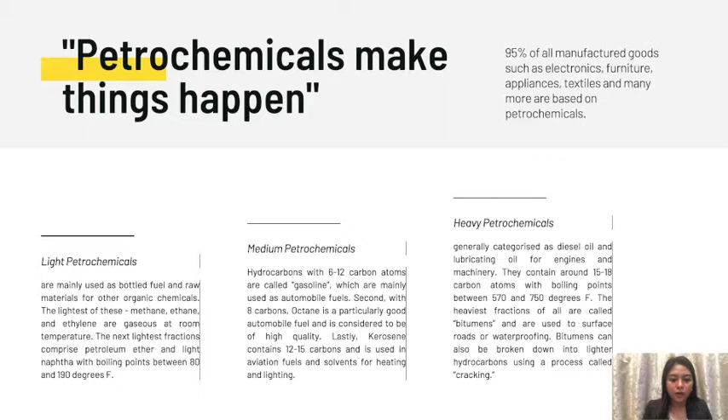Now, hydrocarbons occur naturally in the Earth's crust. Petrochemicals are chemical products made from hydrocarbons present in raw natural gas or petroleum crude oil. This refers to all those compounds that can be derived from refinery products. In the early days of refinery operation, refining was mainly focused on refining a hydrocarbon obtained from oil by batch process. This involved heating the hydrocarbon and condensing the produced vapors to obtain kerosene.

Naphtha and gasoline produced during the process were discarded as waste material. In modern refineries, crude oil is preheated to 750 degrees Fahrenheit and the vapor obtained is passed through the distillation column. The perforation trays vertically arranged at regular intervals help to obtain products of various cuts or fractions. The entire system operates on the principle of thermodynamics and gravity.

Now, in this process, it may be possible that some heavier cuts escape the distillation tower from the top along with the gases. The gases thus produced are subject to refluxing, so that the heavier hydrocarbons escaping along with the gases are condensed and re-injected into the distillation chamber. Similarly, some lighter hydrocarbons that may have been entrapped in the crude oil are subjected to reheating or reboiling.

The temperature at which a product or cut begins to boil is termed the initial boiling point, and the temperature at which complete vaporization of the product or cut occurs is termed the end boiling point.

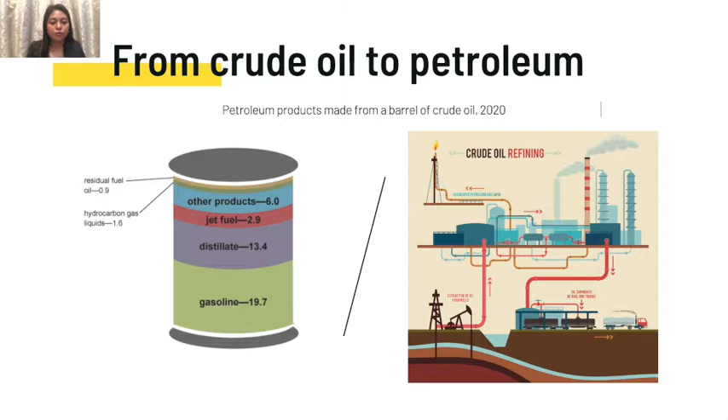After desalting, crude oil is subjected to various refinery processes to obtain final products or cuts. The various products or cuts obtained from the distillation units are dispatched to various sections for subsequent treatment and processing. Now, to understand more about refining crude oil through distillation, let me show you a video.

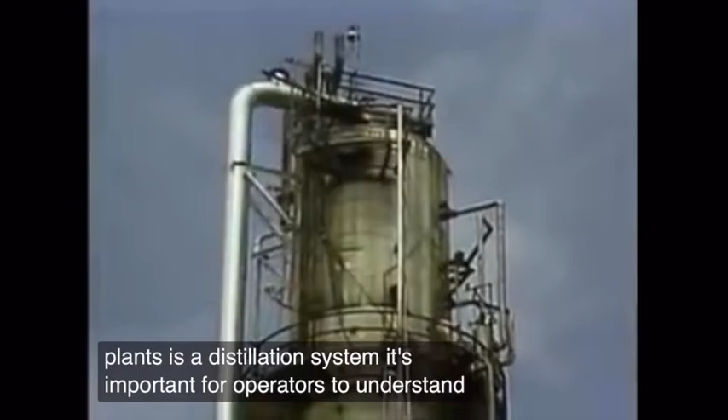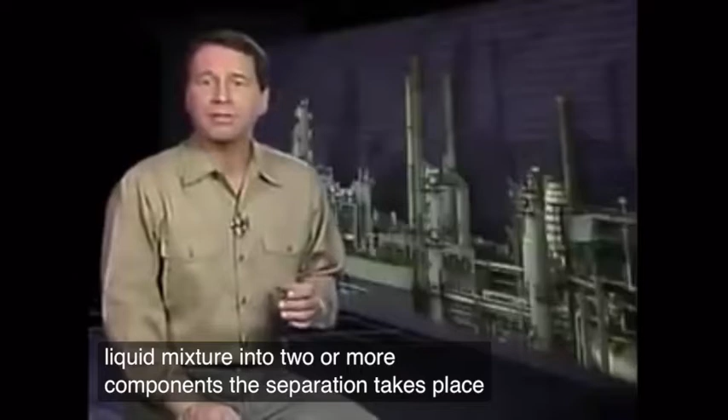One of the key elements of many process plants is a distillation system. It's important for operators to understand how distillation systems work because it's part of their job to make sure the systems run properly. The purpose of any distillation system is to separate a liquid mixture into two or more components. The separation takes place in a distillation column or tower. The liquid mixture is called feed or charge, and the components into which it's separated are called cuts or fractions.

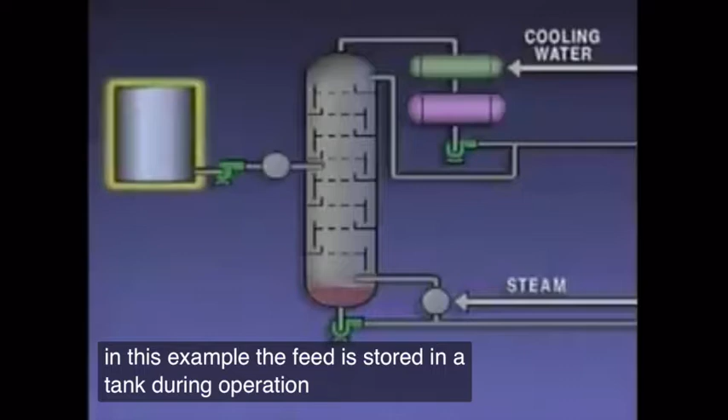Let's take a look at a simplified representation of a distillation system. In this example, the feed is stored in a tank. During operation, a pump is used to move the feed from the tank to a preheater. In the preheater, the mixture is heated under pressure to just below its boiling point.

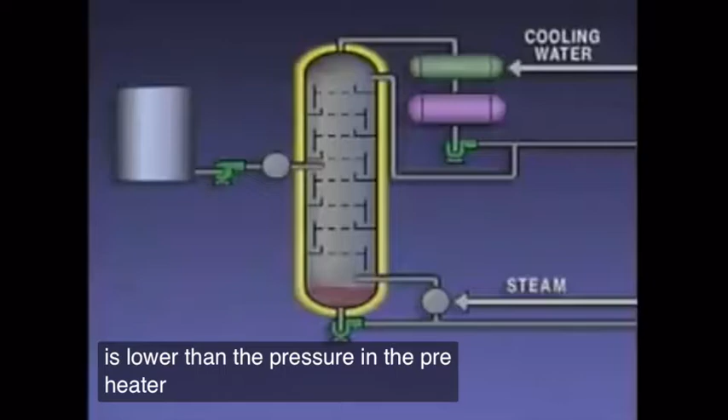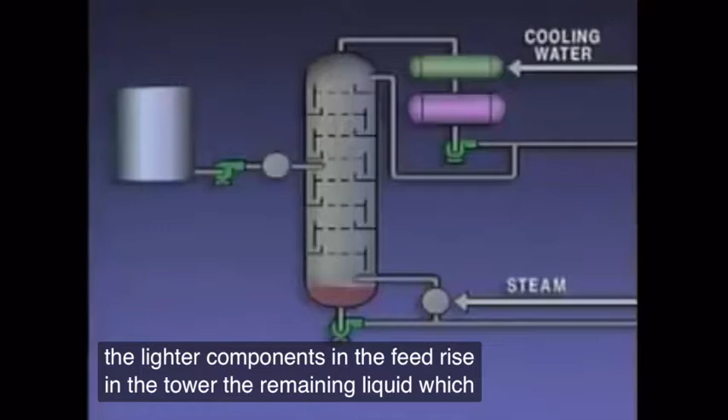The pressure in the tower is lower than the pressure in the preheater, so when the feed enters the tower, it starts to boil. The vapors from the boiling liquid, which primarily contain the lighter components in the feed, rise in the tower. The remaining liquid, which consists primarily of the heavier components in the feed, moves down the tower and collects at the bottom.

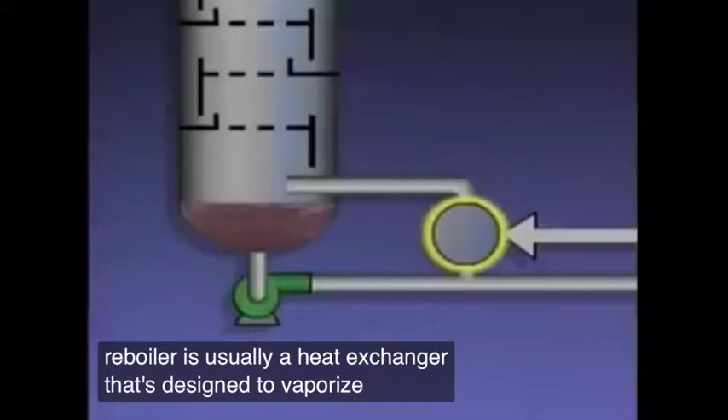Some of this liquid is drawn off as the bottoms product, and some of it is routed to a device called a reboiler, which is connected to the bottom of the tower. The reboiler is usually a heat exchanger that's designed to vaporize the lighter components that remain in the liquid from the bottom of the tower.

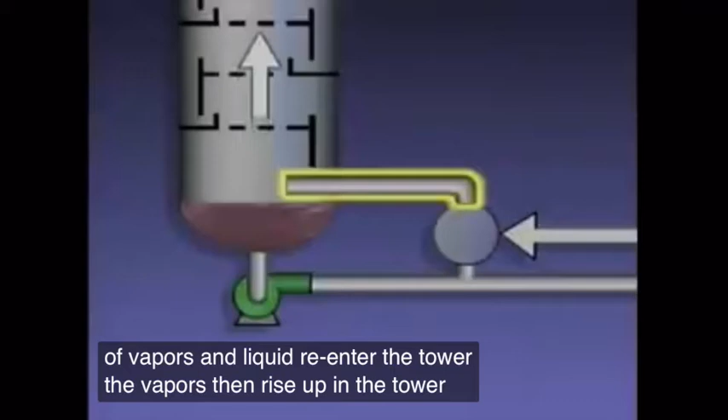Vapors from the reboiler, or in some cases a mixture of vapors and liquid, re-enter the tower. The vapors then rise up in the tower. These vapors and the heat they contain are often referred to as boil-up. The hot boil-up provides heat that's needed for the distillation process to take place in the tower.

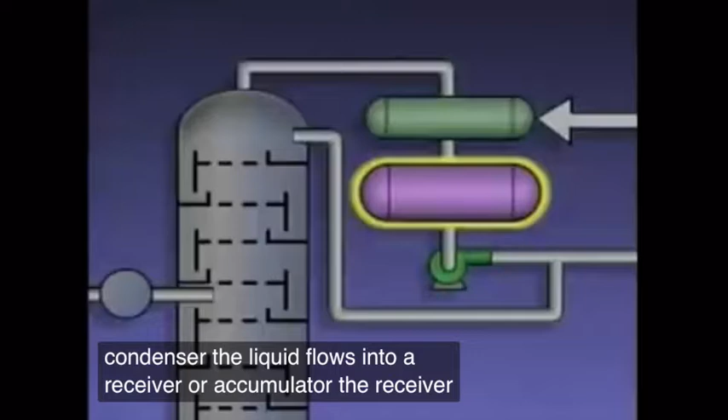The vapors that rise up in the tower are routed to a condenser. The purpose of the condenser is to cool and condense the vapors into liquid. From the condenser, the liquid flows into a receiver or accumulator. The receiver provides a reservoir for the liquid. Part of the liquid from the receiver is pumped back into the top of the tower, and part of it is drawn off as the tower's overhead product.

Well, we've just looked at one simple example of a distillation system. Not all distillation systems are the same, but most of them have the basic equipment that we've just seen. At the heart of a distillation system is the distillation tower. Basically, a distillation tower is a series of distillation processes, or stills, stacked on top of each other. The process of distillation is sometimes referred to as fractional distillation, or fractionation, and distillation towers are sometimes called fractionators. Fractionation is distillation that occurs at different levels in a tower.

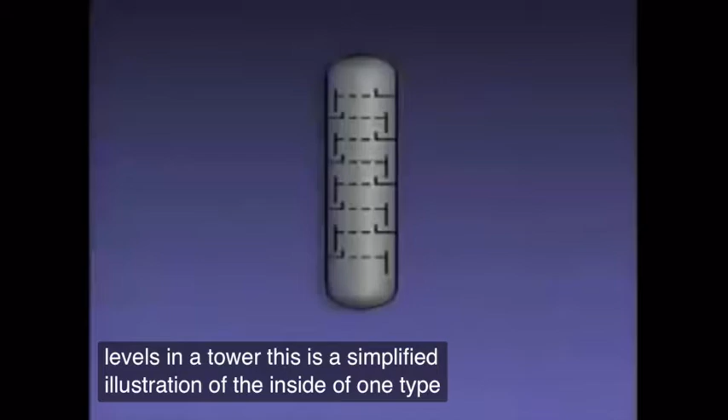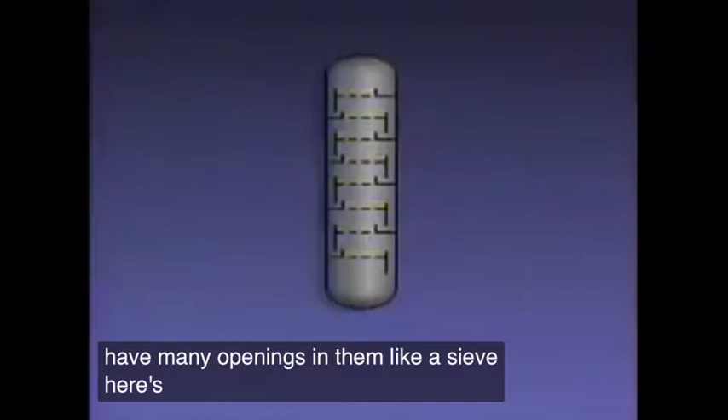This is a simplified illustration of the inside of one type of distillation tower. This tower uses trays called sieve trays to separate vapors and liquid. The trays are spaced throughout the tower. They're called sieve trays because they have many openings in them, like a sieve. Here's a closer view of some of the trays. We've exaggerated the size of the openings to make them easier to see.

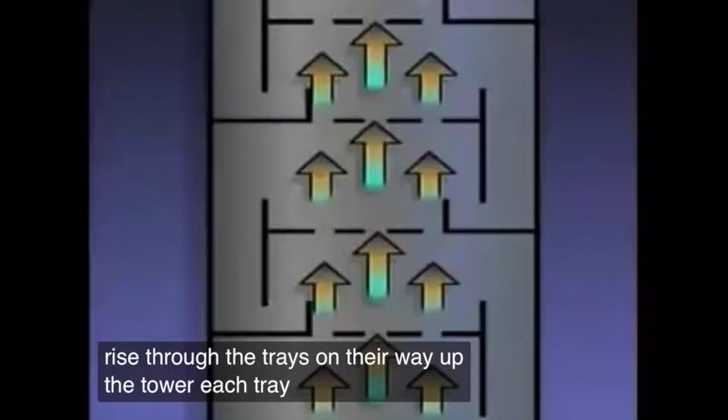The openings in the trays allow vapors to rise through the trays on their way up the tower. Each tray is also designed to hold liquid. Dams or weirs on each tray allow liquid to build up on the tray. Liquid that overflows the weirs flows into downcomers. The downcomers channel the liquid from tray to tray down the tower.

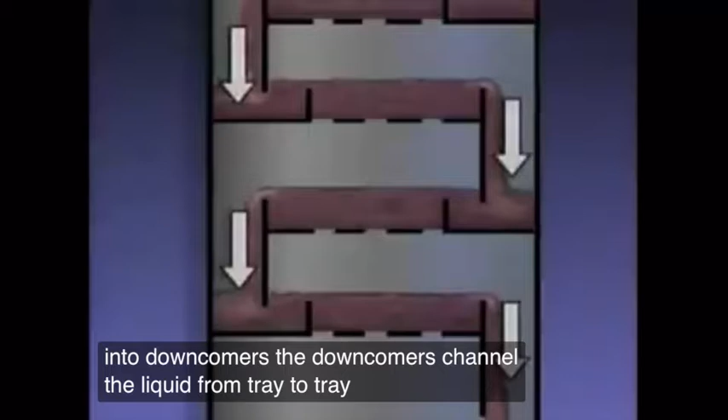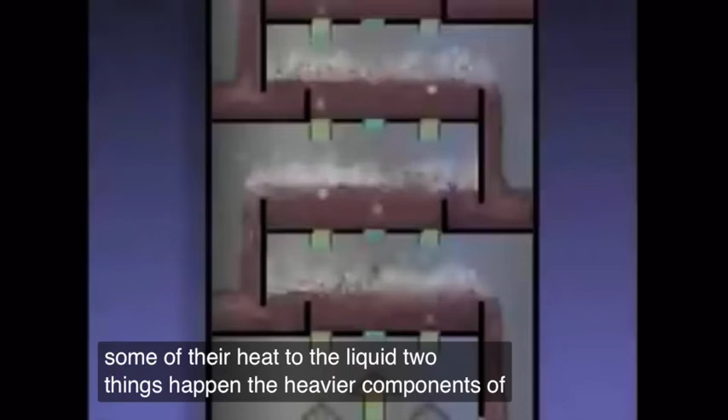When the upward moving vapors and the downward flowing liquid come in contact on each tray, the vapors transfer some of their heat to the liquid. Two things happen: the heavier components of the vapors become cooler and condense into liquid, and the lighter components of the liquid boil. The vapors then rise toward the next tray.

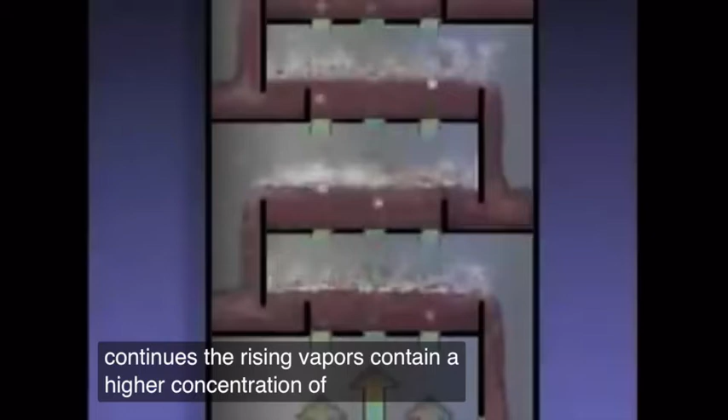As this process continues, the rising vapors contain a higher concentration of lighter components and a lower concentration of heavier components. This is how the distillation process is repeated on each tray as the vapors rise through the tower.

Not every distillation tower is designed in the exact same way. However, every tower can be divided into three basic sections.

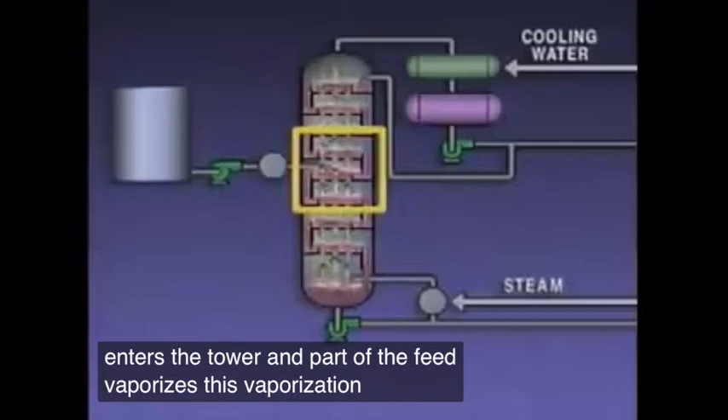The middle section is where the feed enters the tower and part of the feed vaporizes. This vaporization is commonly known as flashing, so this section of the tower is often called the flash zone.

The section above the flash zone is called the rectification section. In this part of the tower, the concentration of lighter components increases.

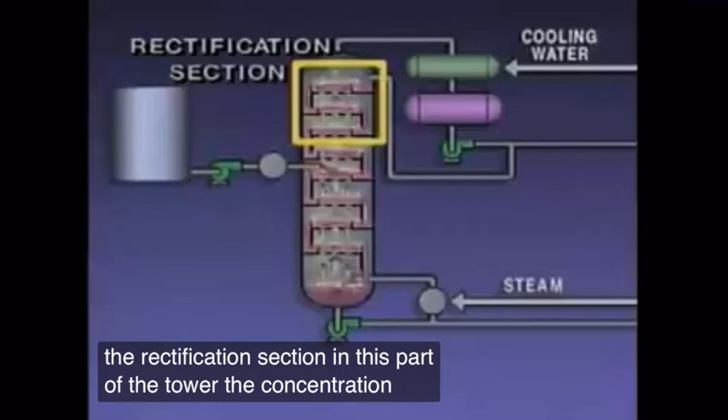The section of the tower below the flash zone is called the stripping section. In this section, the lighter components are vaporized, or stripped, from the heavier liquid.

If a distillation tower worked perfectly, it would produce pure products. Unfortunately, that's not the case. The lighter products usually contain some heavier fractions, and the heavier products usually contain some lighter fractions. This is sometimes referred to as overlap.

Distillation systems use several methods to help maximize the purity of the products. One of these methods is called refluxing. The vapors coming off the top of the tower are condensed in a condenser and then collected in a receiver.

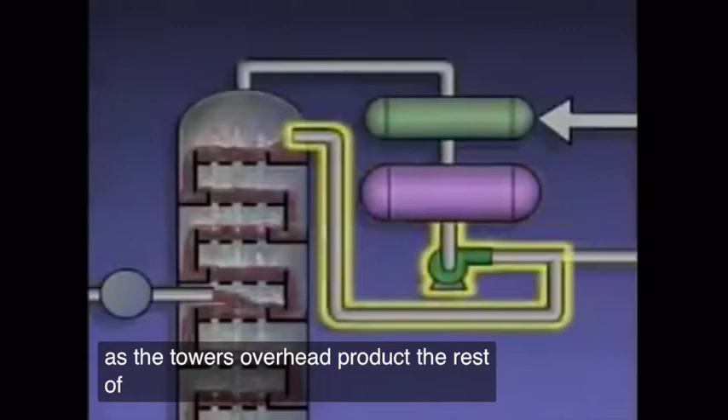Part of the liquid from the receiver is sent to storage or to other units in the plant as the tower's overhead product. The rest of the liquid is pumped back into the top of the tower. The liquid that's reintroduced into the tower is called external reflux.

Because it consists of liquid that was cooled in the condenser, the external reflux is cooler than the liquid in the top of the tower. As the external reflux cools the top of the tower, vapors made of heavier fractions condense.

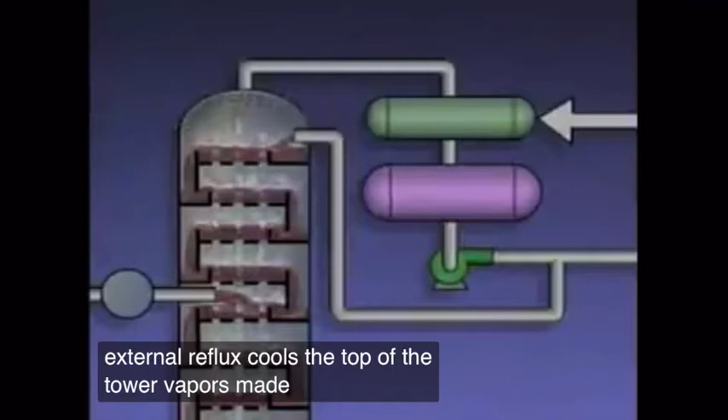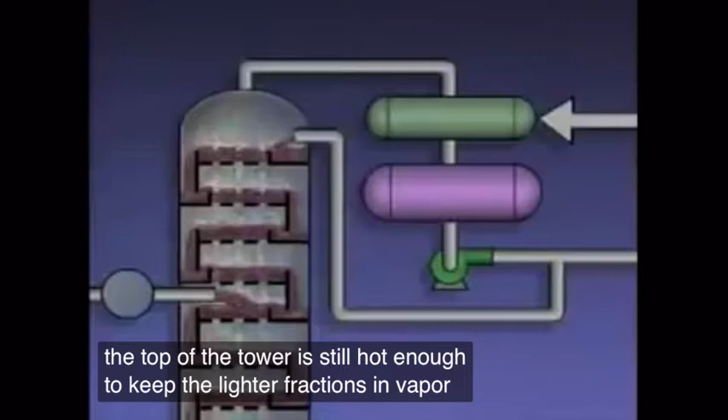The liquid made of heavier fractions flows down the tower and is referred to as internal reflux. Meanwhile, the top of the tower is still hot enough to keep the lighter fractions in vapor form. The vapors are drawn off the top of the tower and into the condenser.

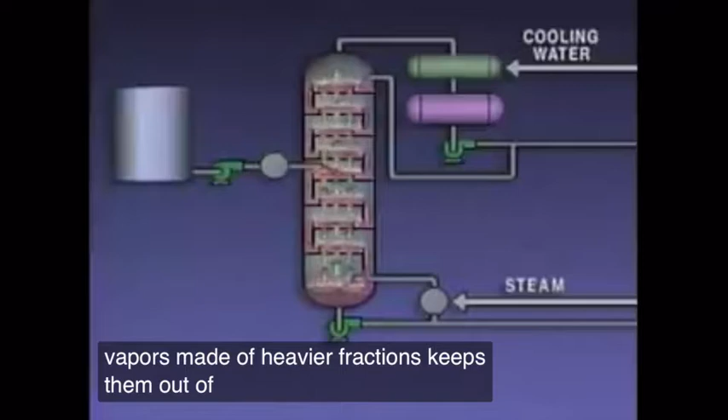Refluxing increases the purity of the overhead product because condensing the vapors made of heavier fractions keeps them out of the stream of vapors that leaves the top of the tower.

Another method used to maximize product purity is called reboiling. The bottoms liquid that's drawn off from the tower is sent to a heater called a reboiler.

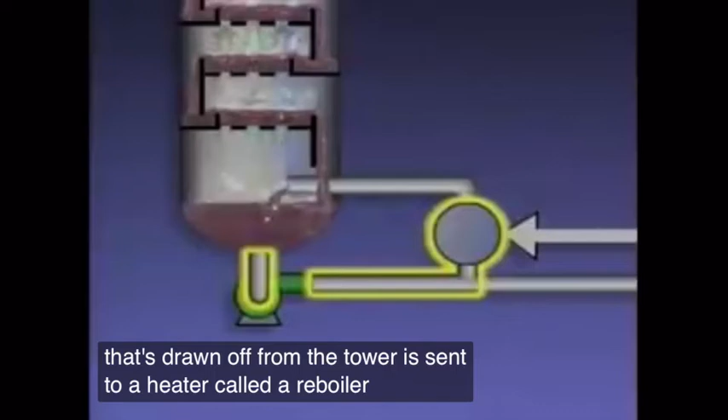The rest of the bottom's liquid is sent to storage or to other units in the plant as the tower's bottom's product. The reboiler heats the liquid it receives so that a mixture of vapors and liquid is formed.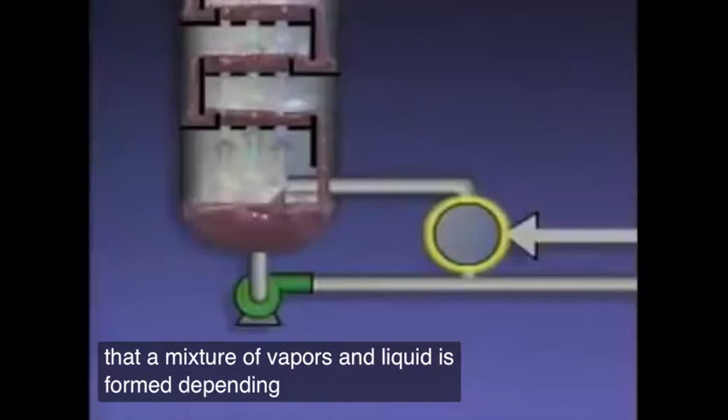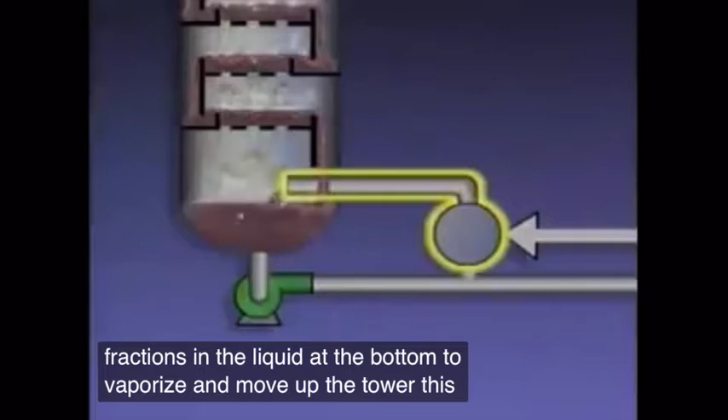Depending on the system, either vapors or the mixture of vapors and liquid is then reintroduced into the tower. The hot vapors cause any lighter fractions in the liquid at the bottom to vaporize and move up the tower. This reduces the amount of lighter fractions in the bottom's product.

The reboiler provides the major portion of the heat that's required to make the distillation process work. In the type of system we've been discussing, the heat supplied by preheating the feed is not sufficient for proper distillation. The reboiler is needed to provide enough additional heat to vaporize the lighter fractions in the tower so that the products meet specifications.

Although all distillation towers serve the same basic function, they don't all have the same internal components. One type of tower uses trays called sieve trays to separate vapors and liquid. That type of tower is covered in the tower operation part of this program. In this part, we'll look inside two other types of distillation towers and see how their internal components differ.

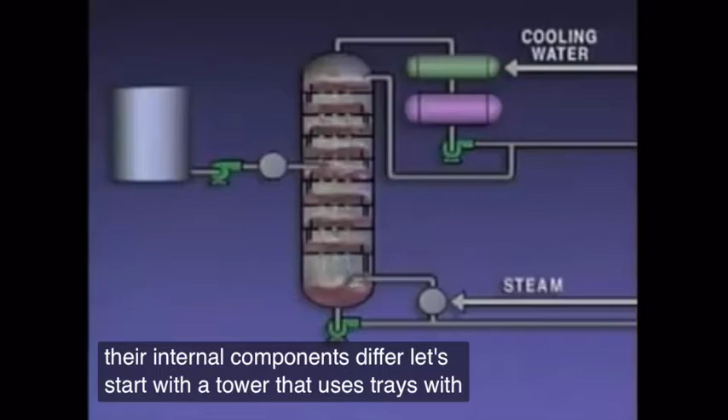Let's start with a tower that uses trays with bubble caps. The holes in each tray are covered with caps called bubble caps. The slots in these bubble caps disperse the rising vapors through the liquid on the tray.

Each bubble cap has many slots, and each tray has many bubble caps to spread out the vapors. This ensures maximum contact between vapors and liquid so that maximum heat transfer can take place.

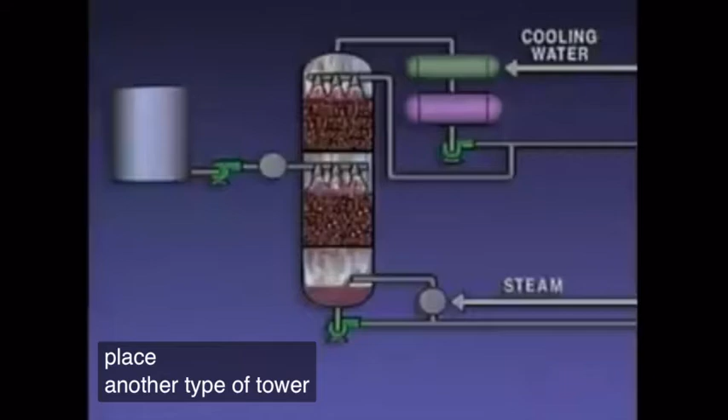Another type of tower, called a packed tower, contains layers of devices called packing instead of trays with bubble caps. There are many different types of packing.

Some towers have sections that are filled with cylindrical rings like the one illustrated here. It's known as a Raschig ring. Another type of packing is known as a Berl saddle.

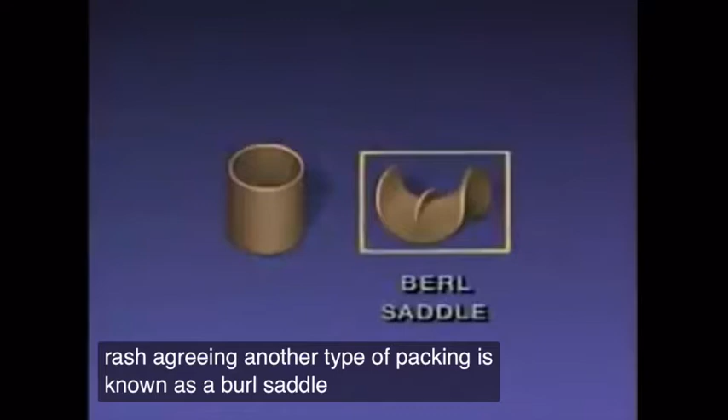The packing breaks up the liquid so that it flows over a large amount of surface area. This exposes more of the liquid to the vapors and increases heat transfer from the vapors to the liquid.

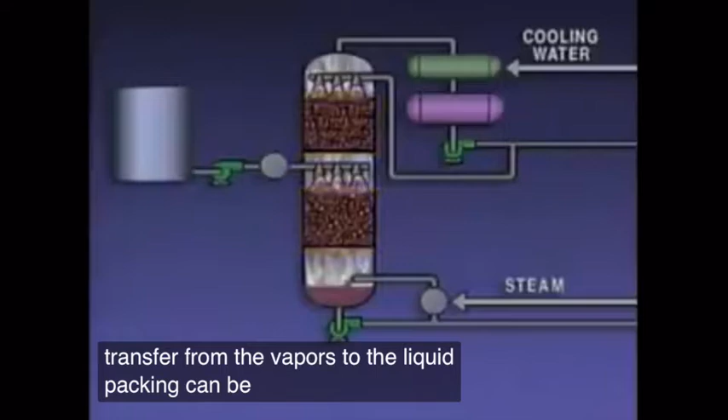Packing can be made from many different materials, including porcelain, copper, aluminum, and iron. The main requirement is that the material must be compatible with the liquid in the tower and the conditions under which the tower is operated.

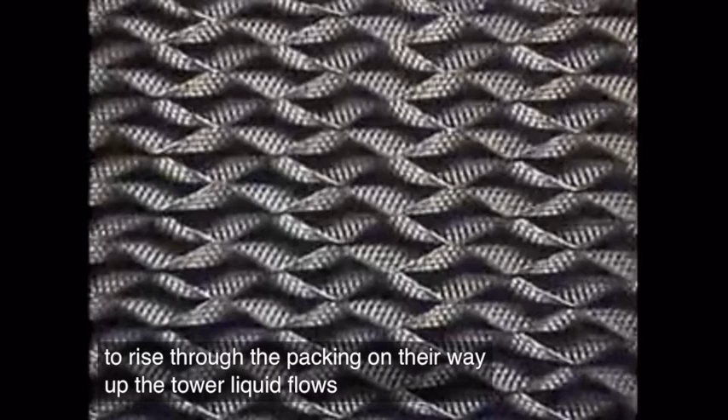This is a section of another type of packing from a distillation tower called a packing grid. Each layer in the grid has spaces for vapors to rise through the packing on their way up the tower. Liquid flows over these surfaces, which channel the liquid as it flows down the tower. The packing grid provides a great deal of surface area where contact between the vapors and the liquid can take place, so heat transfer is maximized.

Temperature control is crucial to the operation of a distillation system. Correct temperatures are necessary to vaporize the lighter components of a liquid mixture while keeping the heavier components to a minimum. If the temperatures at certain points in the system are either too high or too low, acceptable products won't be produced.

Let's go over several points in a distillation system where temperature is monitored. As we do, keep in mind that the mixture we'll be referring to is a binary liquid mixture, that is, a mixture that has two components.

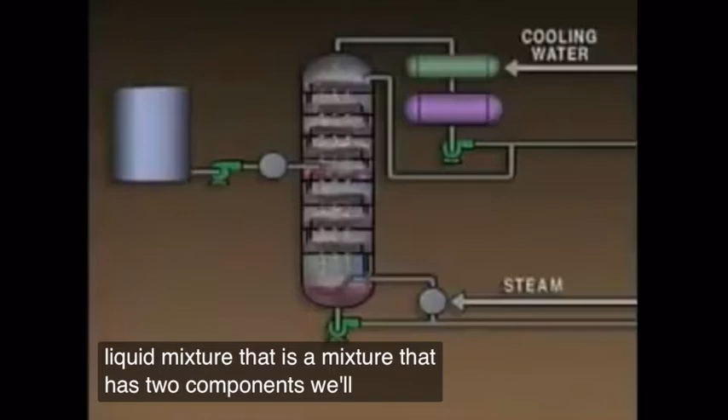We'll begin with the temperature at the top of the tower. The temperature at the top of the tower should be at or slightly above the boiling temperature of the desired overhead product at the operating pressure of the tower.

If the temperature at the top of the tower is higher than it should be, more of the heavier components will vaporize and become part of the overhead product, instead of flowing down the tower as a liquid. On the other hand, if the temperature at the top of the tower is lower than it should be, less of the lighter components will vaporize. Some of the lighter components will remain as a liquid and flow down the tower.

The temperature at the bottom of the tower is also important. It is usually slightly below the boiling point of the heavier component.

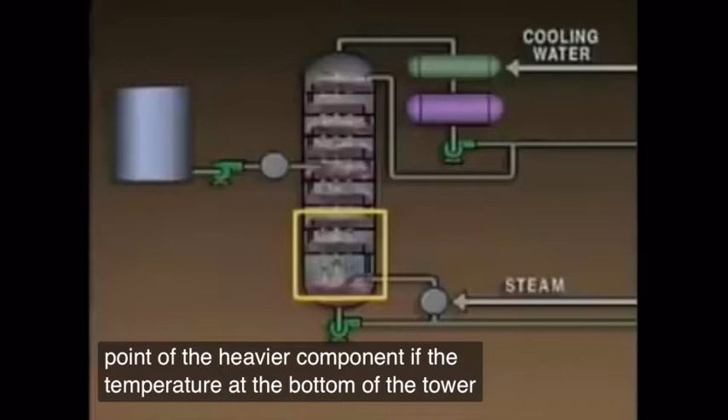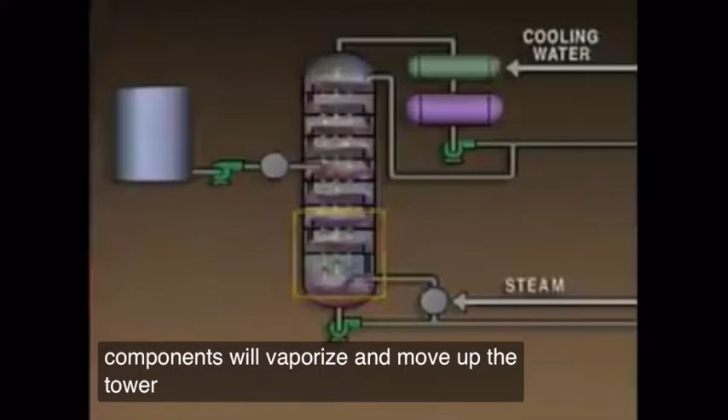If the temperature at the bottom of the tower is too high, more of the heavier components will vaporize and move up the tower instead of remaining as a liquid. If the temperature at the bottom of the tower is too low, less of the lighter components will vaporize and move up the tower. Another place where temperature control is important is at the feed point.

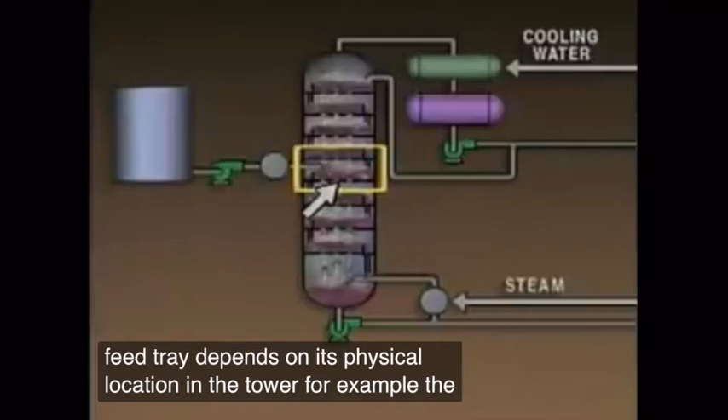The temperature at the feed point should be within the boiling range of the mixture, and should be close to the temperature of the feed tray. The temperature of the feed tray depends on its physical location in the tower. For example, the lower the feed tray is in the tower, the higher its temperature will be.

If the temperature at the feed point is higher than it should be, more of the heavier components will vaporize and move up the tower instead of moving down as a liquid. On the other hand, if the feed point temperature is too low, less of the lighter components will vaporize, and more lighter components will end up in the bottom of the tower.

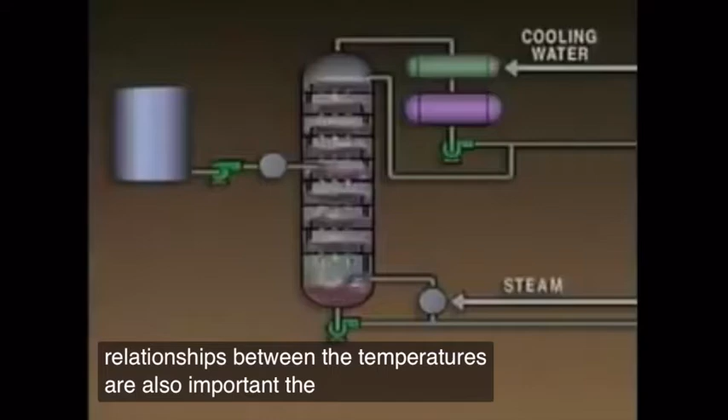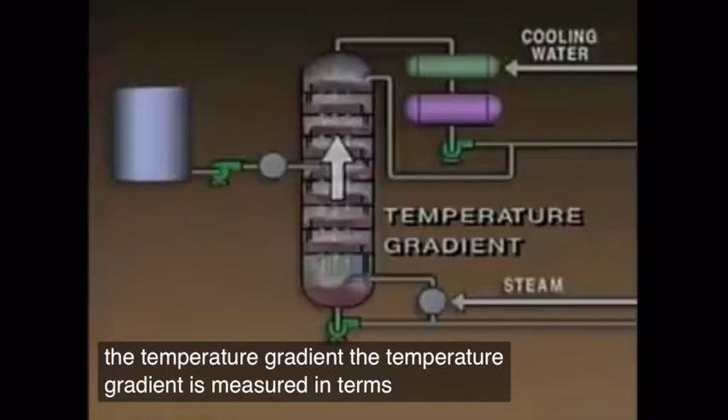While the temperatures at various points in a distillation system are important, the relationships between the temperatures are also important. The temperature decreases as the material moves higher in the tower. This gradual decrease in temperature from the bottom of a distillation tower to the top is called the temperature gradient, measured in terms of the difference between the temperature at the bottom of the tower and the temperature at the top of the tower.

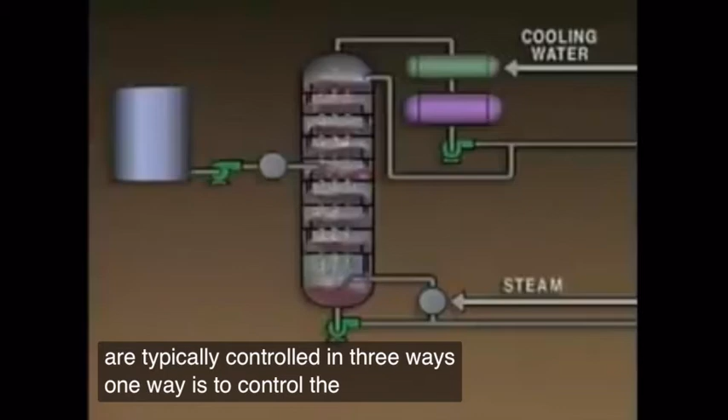In order to maintain the proper temperature gradient, temperatures at critical points in the system must be controlled. Temperatures in a distillation system are typically controlled in three ways. One way is to control the temperature of the feed mixture by using a preheater. This regulates the temperature at the feed point.

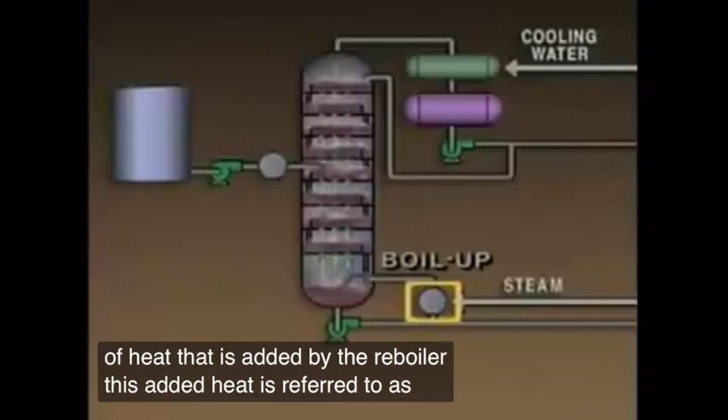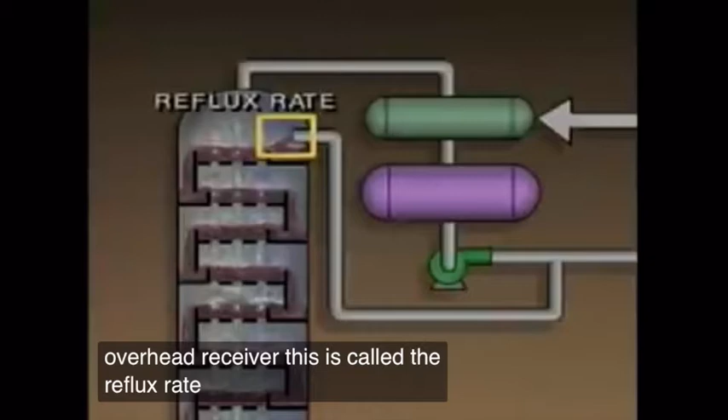At the bottom of the tower, temperature is controlled by the amount of heat that is added by the reboiler. This added heat is referred to as boil-up. The temperature at the top of the tower is controlled by the amount or the temperature of the cool liquid that's pumped back into the tower from the overhead receiver. This is called the reflux rate. Increasing the reflux rate decreases the temperature at the top of the tower.

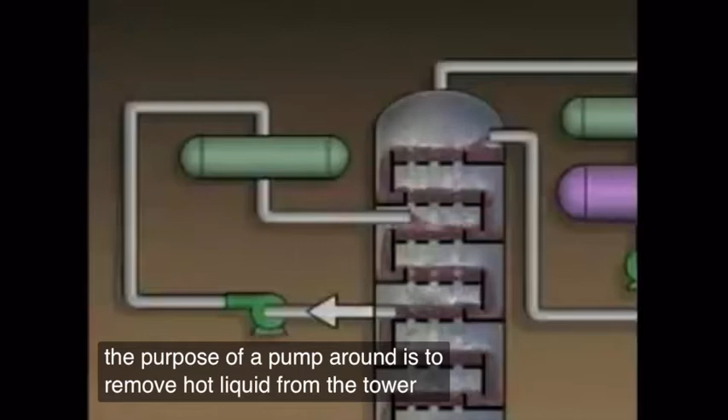Some distillation systems contain equipment known as pump-arounds. The purpose of a pump-around is to remove hot liquid from the tower and pump it through a cooler. The cooled liquid is then reintroduced at a higher level in the tower. A pump-around helps control the temperature of the internal reflux.

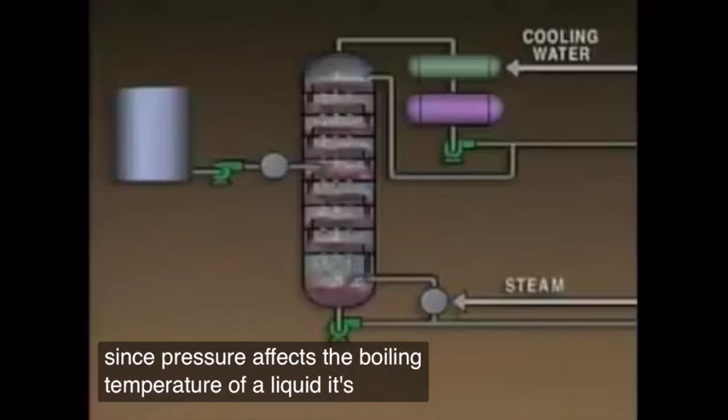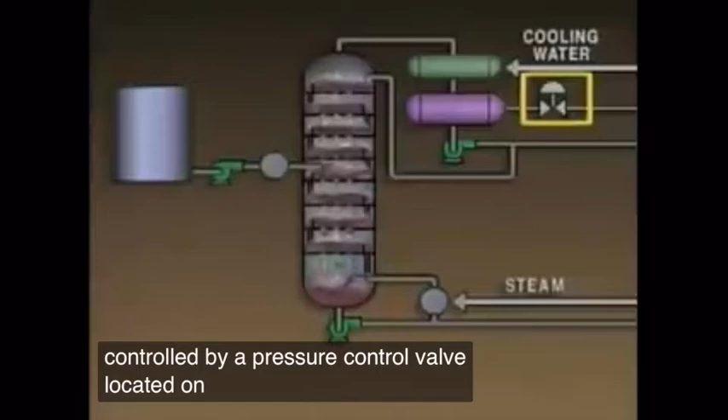Since pressure affects the boiling temperature of a liquid, it's an important factor in the distillation process. If pressures in a distillation system are not correct, product purity could decrease. Tower pressure is often controlled by a pressure control valve located on the overhead receiver. This valve controls pressure by releasing vapors and any non-condensable gases that have collected in the receiver. In some cases, a vacuum system draws gases from the receiver to control tower pressure.

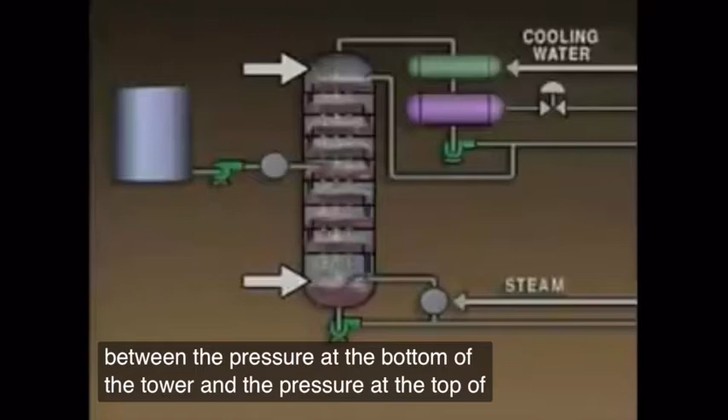Another pressure that's important to an operator is the tower's differential pressure. The tower's differential pressure is the difference between the pressure at the bottom of the tower and the pressure at the top of the tower. This difference in pressure is caused by the flow of vapors in the tower. Without vapor flow, there is no differential pressure.

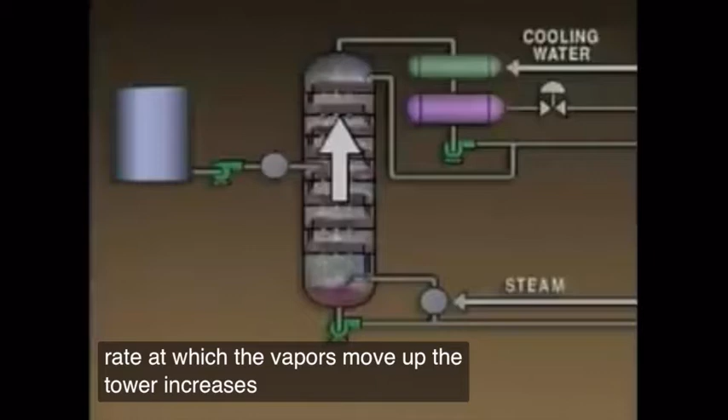Generally, if the rate at which the vapors move up the tower decreases, the differential pressure will also decrease. And if the rate at which the vapors move up the tower increases, the differential pressure will increase. Changes in the differential pressure may indicate that a problem exists.

For example, an increase in differential pressure could be an indication that the feed rate is too high. Too much feed entering the tower will overload it. If this happens, the differential pressure will increase, and the tower will be unable to make the desired separation. In this case, it might be necessary to decrease the feed rate.

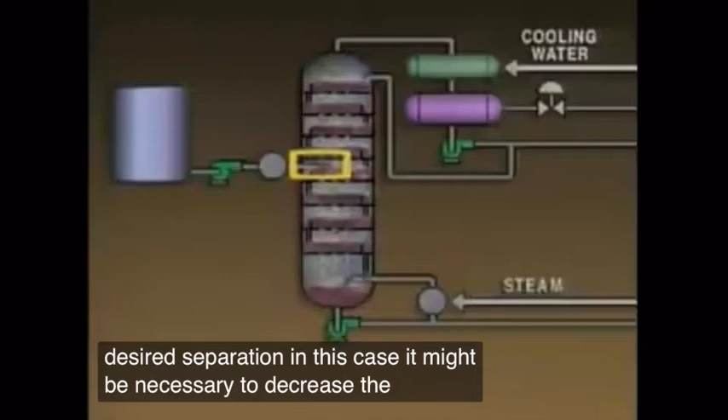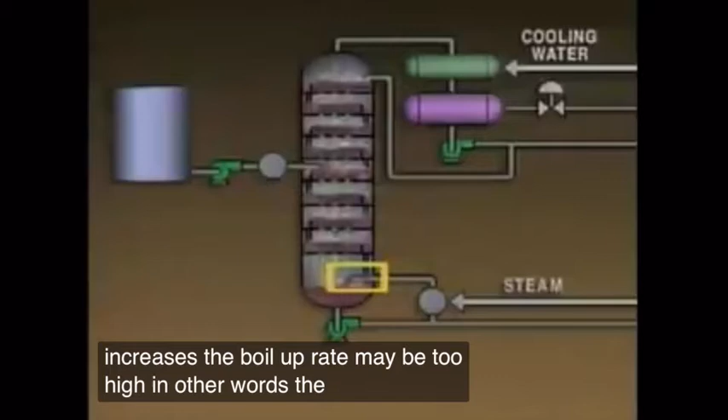Now, changes in the tower's differential pressure may be caused by other problems. For example, if the differential pressure increases, the boil-up rate may be too high. In other words, the reboiler may be returning too much vapor or vapor-liquid mixture to the tower. This problem can be corrected by reducing the boil-up rate.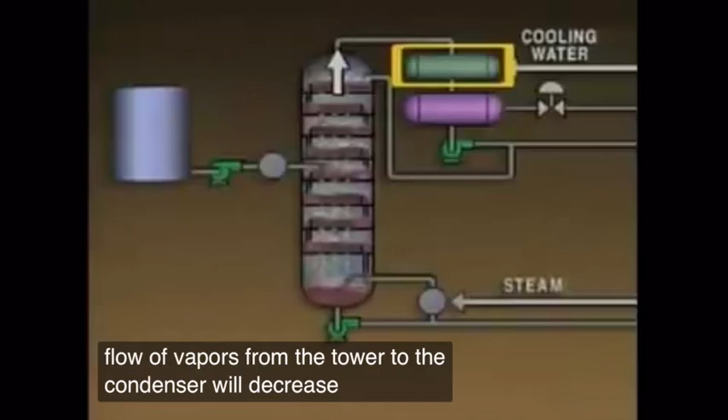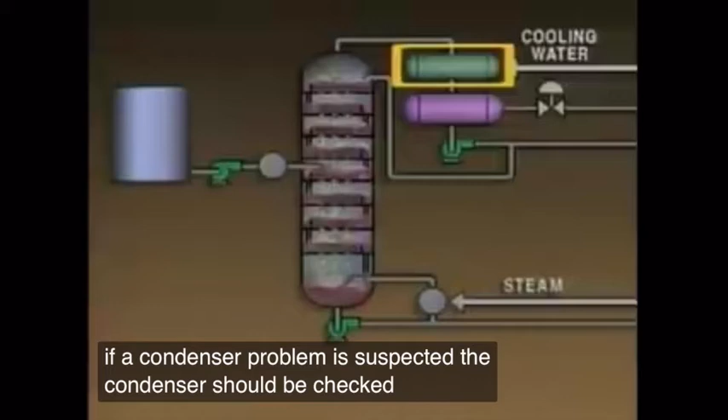Another problem that may affect the tower's differential pressure is a decrease in condenser efficiency. If the condenser's tubes are plugged or there's not enough cooling water flowing through the condenser, pressure will increase. As a result, the flow of vapors from the tower to the condenser will decrease, and so will the vapor flow up the tower. This means that the tower top pressure will increase, and the differential pressure will decrease. If a condenser problem is suspected, the condenser should be checked, and corrective action should be taken if necessary.

Now, changes in the tower's differential pressure may have other causes in addition to the ones we've identified, so it's important to carefully evaluate any situation before corrective action is taken.

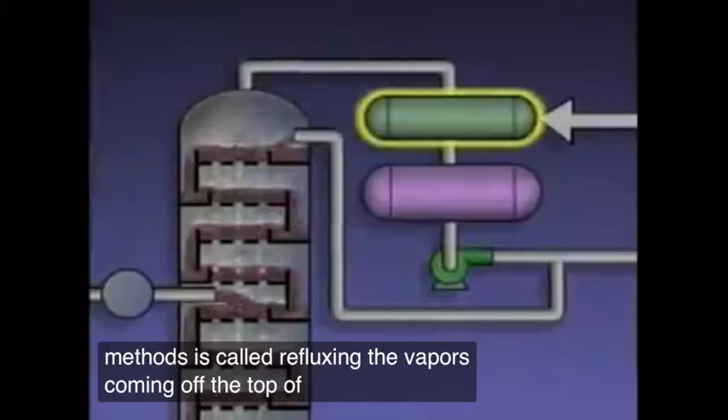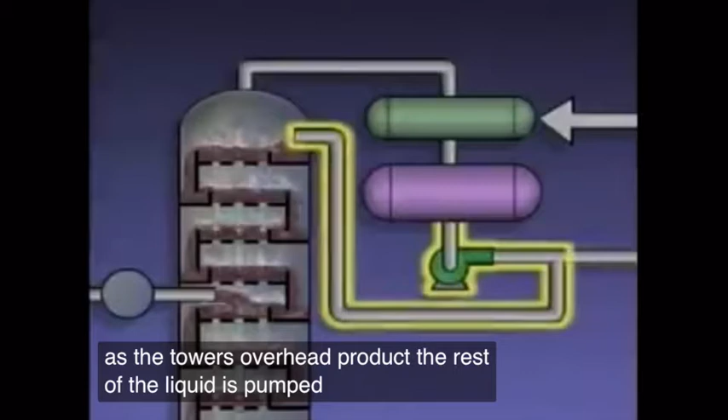One of these methods is called refluxing. The vapors coming off the top of the tower are condensed in a condenser and then collected in a receiver. Part of the liquid from the receiver is sent to storage or to other units in the plant as the tower's overhead product. The rest of the liquid is pumped back into the top of the tower. The liquid that's reintroduced into the tower is called external reflux. Because it consists of liquid that was cooled in the condenser, the external reflux is cooler than the liquid in the top of the tower.

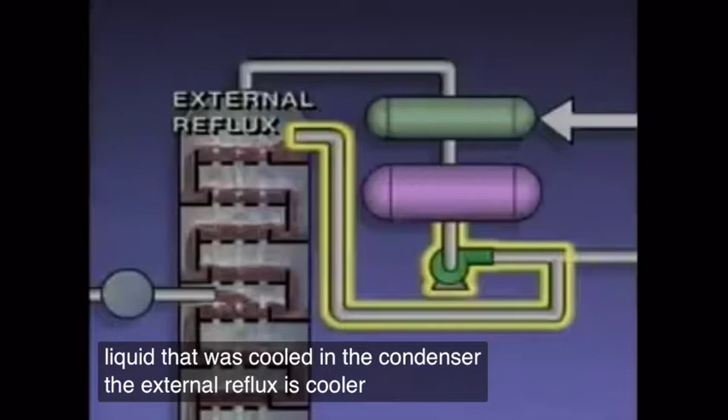In this topic, we looked at two key factors in the distillation process: temperature and pressure. Remember that although we discussed them separately, temperature and pressure work together. Both of these factors must be correct for the distillation process to work properly.

Now, to summarize what was shown in the video: crude oil is extracted from the Earth's surface with the help of drilling. Since pressure increases as we go deep inside the surface of the Earth, drilling releases pressure and oil is made to flow through a pipe and collected in a huge tank. After collecting the crude oil, it is sent to the petrochemical industry for further processing.

Firstly, if the crude oil is collected from the sea, it needs to be desalted. In the second step, the crude oil is then distilled at high temperature and pressure to separate various components based on their volatility. For instance, natural gas, gasoline, kerosene, and diesel are the top products and are highly volatile, while lubricating oil, bitumen, tar, and asphalt are highly viscous and have low volatility, and these are considered the bottom products.

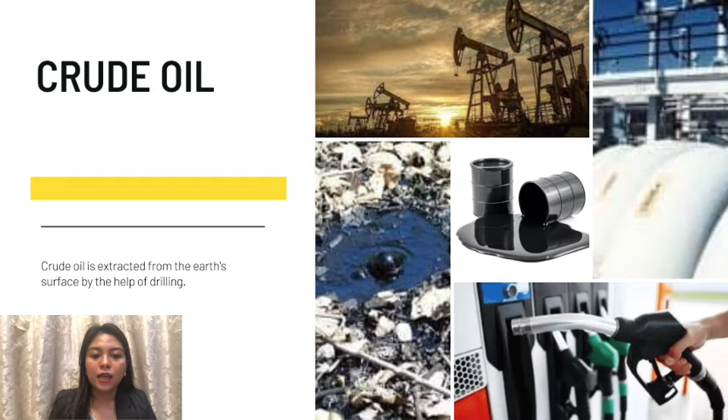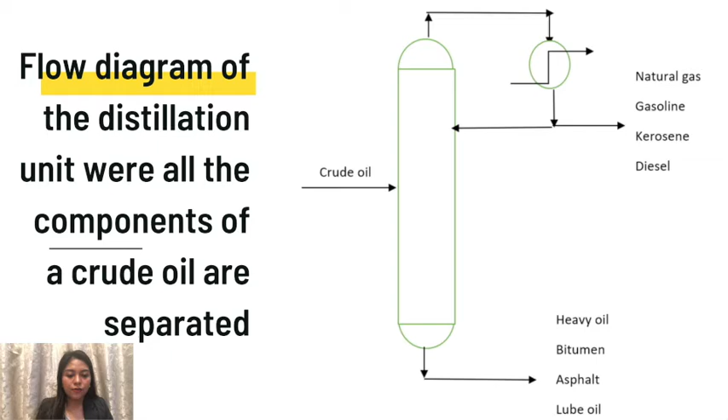Now consider the flow diagram of the distillation unit here, where all the components of the crude oil are separated based on their volatilities. So you can see here, crude oil is being fed into the column, and we have overhead products of natural gas, gasoline, kerosene, and diesel, and bottom products as heavy oils, bitumen, asphalt, and lube oil.

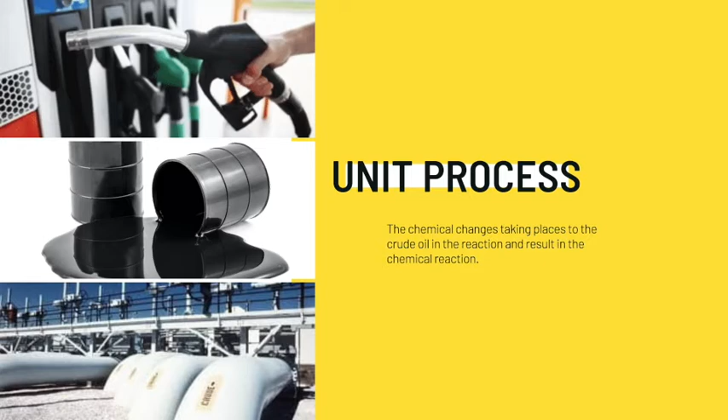There are various types and quality in each of the products obtained, like regular, mid-range, and premium gasoline. The reaction for the formation of gasoline is as follows: propylene plus isobutane becomes 2,3-dimethylpentane.

Now, the unwanted product in crude oil is sulfur. The reaction for the removal of sulfur is as follows: thiophene plus hydrogen peroxide, which is the catalyst, becomes thiophene oxide, and again it's added with hydrogen peroxide as its catalyst, now becoming thiophene dioxide sulfone.

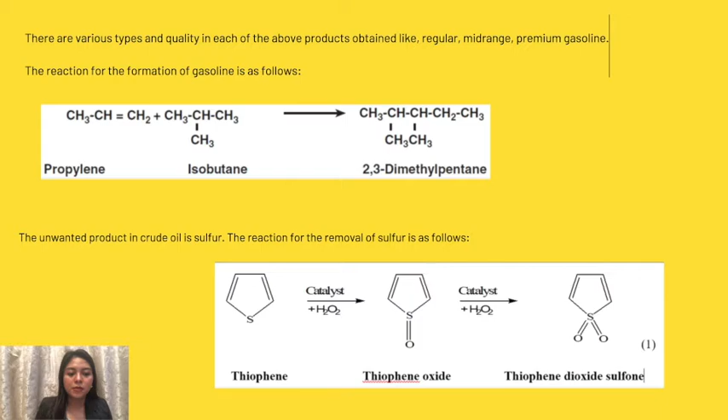Now the unit operations in crude oil processing are as follows: first, a desalting unit, then distillation, then hydrotreating and hydrocracking units. After that, reforming, next alkylation unit, and lastly, polymerization unit.

Each of the above unit operations have specific use and application. For instance, isomerization is used to improve the octane rating of straight-run gasoline, paraffins, and isoparaffins. Alkylation is the process to make gasoline components from materials that are too light, and polymerization is an alternative method to alkylation.

In polymerization, olefins are reacted to produce larger olefin molecules in the gasoline range. Hydrotreating and hydrocracking is the removal of unwanted material from gasoline, such as sulfur compounds that are refractory, offering resistance to high temperature and pressure. The process takes place at high temperature and pressure in the presence of catalysts such as nickel and molybdenum.

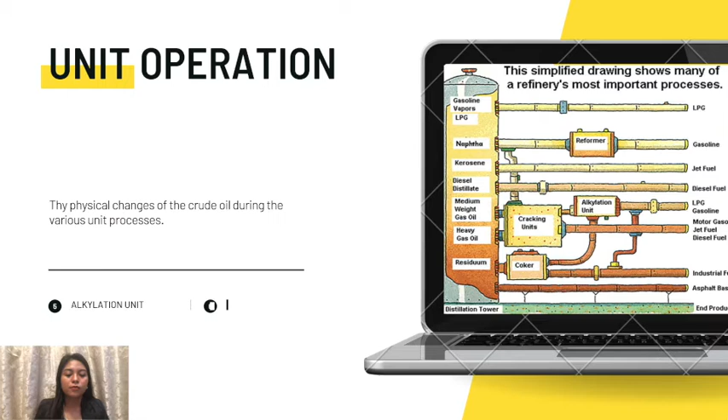To conclude, petrochemicals are an essential constituent of the chemical industry. About 5% of the oil and gas consumed each year is needed to make all the petrochemical products, and demand for synthetic material, employment generation, and basic needs grow continually, playing a significant part in today's economy and society. Hence, it's a vast field that encompasses many commercial chemicals and polymers.

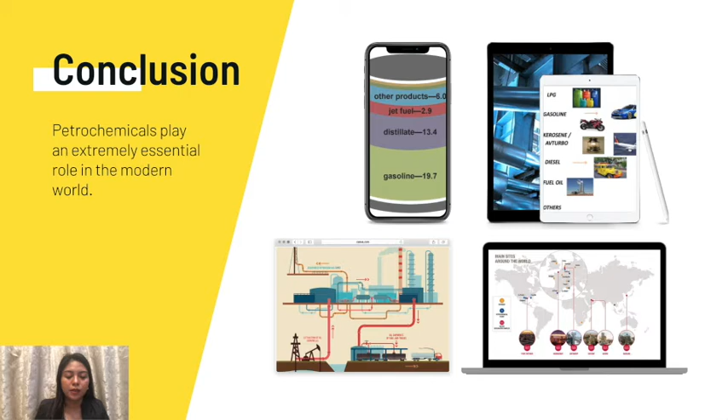Petrochemicals again play an essential role in our food, clothing, shelter, and leisure due to their low cost and easy availability. Oil and natural gas are considered to be the primary sources of raw materials for most petrochemicals.

Okay, now for frequently asked questions, we have 3 questions. Is crude oil and petroleum the same? Or, why do we call petroleum crude oil as well? This is because crude oil is a mixture of hydrocarbons that exists as a liquid in underground geologic formations and remains a liquid when brought to the surface.

Petroleum products are produced from the processing of crude oil and other liquids at petroleum refineries, from the extraction of liquid hydrocarbons at natural gas processing plants, and from the production of finished petroleum products at blending facilities. Petroleum, on the other hand, is a broad category that includes both crude oil and petroleum products. Hence, the terms oil and petroleum are sometimes used interchangeably.

Now, how many products are made from petroleum? We have an estimate of more than 6,000 products currently made from oil and gas. Clothing is just one part of our lives in which oil and gas plays a part. In fact, there are literally thousands of products made from oil and gas, many of which you probably use every day - let's say, electronics.

And the last question: does the Philippines have crude oil? According to what I've researched, the Oil and Gas Journal said that the Philippines had 139 million barrels of proved crude oil, including lease condensate reserves, in 2019. The Philippines has only 2 active petroleum fields: Galoc, an offshore field in the northwest Palawan Basin, and Alegria, an onshore field in the province of Cebu.